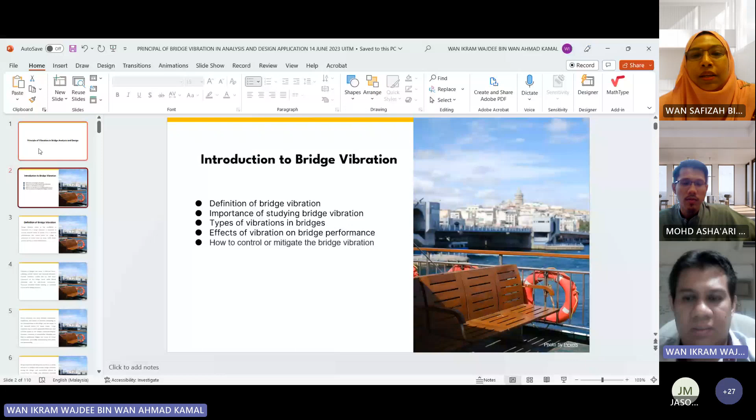Can see? Yeah. Very clear. Okay. Full screen. Okay. It will be better. Okay, thank you, Dr. Wan Safizah and Dr. Asha'ari. And again, good morning and Assalamualaikum to all of you, especially to our students.

Please permit me to share what you can see now on the screen. This is my topic for this morning: principle of vibration in bridge analysis and design. This is the outline, the introduction to this morning's topic. First, let me introduce to you and elaborate the definition of bridge vibration.

Next, the importance of studying bridge vibration: why we need to study this topic when we do the analysis for the bridge. Then the type of vibration in bridges, the cause of the vibration in the bridge, and the effect of the vibration, where we will look into the side effects of vibration on the bridge structure. Then how to mitigate, I mean how to address, this vibration on the bridge.

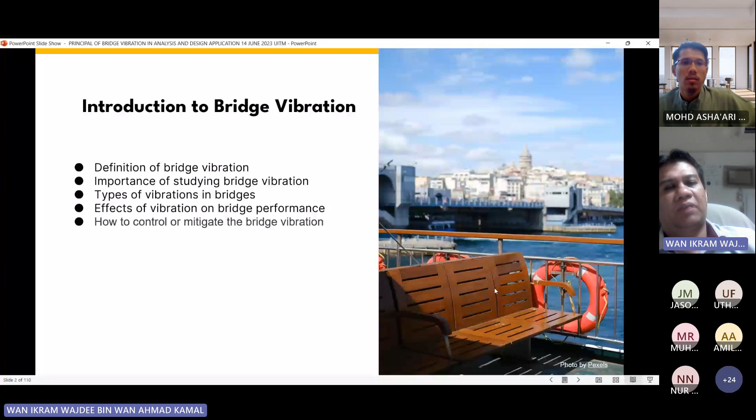First, vibration refers to the oscillation or movement of the bridge structure in response to various external or stimulating forces. It is a dynamic phenomenon that occurs when the bridge is subjected to forces such as wind, traffic load, seismic activity, or other disturbances. Actually, there are many external loads that cause bridge vibration.

For our case, as road users in our country, we are not really affected by seismic activity. The vibration on bridges in Malaysia is due to traffic highway loading. This is our concern now, because when this becomes prolonged, it will eventually affect the performance of the bridge.

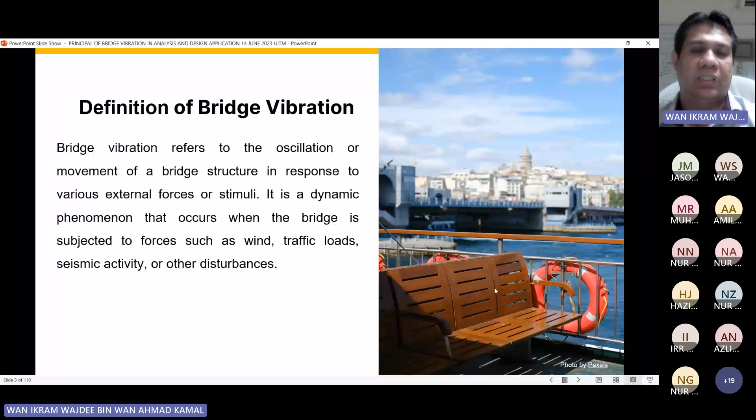Vibration in bridges can occur in different forms, including vertical, lateral, and torsional vibration. When we run the analysis, for example when we formulate the finite element model, we can capture the mode shapes associated with the corresponding vibration frequencies. This result gives the impression that vibration can be induced in any direction of the bridge system.

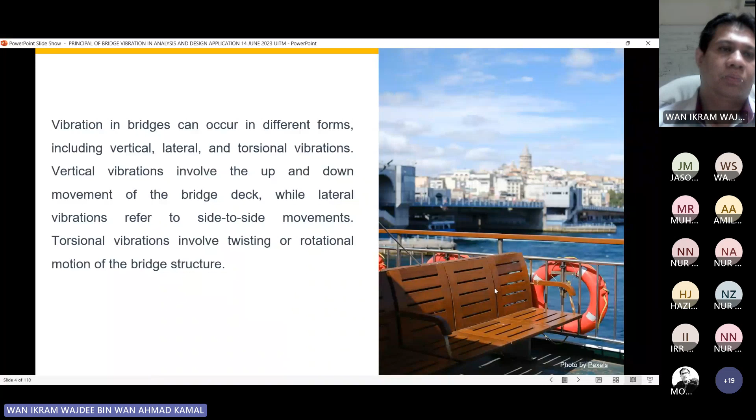For our case, when we do the analysis, the vertical first mode shape is the main concern in the analysis and design of the bridge, because vertical vibration gives more effect compared to the other directions. Vibration can have different frequency, amplitude, and mode depending on the characteristics of the bridge and the nature of the load.

This statement explains that the vibration as well as the frequency of the bridge depend on the geometry of the structure, and also the stiffness: how we as engineers or designers arrange the structure and plan the stiffness of the overall bridge system.

Let's choose one example, like the girder bridge. When we do the design, we give the girder itself as the stiffer component compared to other components like the column or foundation, because at the end of the day this component will take more load, and it directly accepts the loading from the vehicles and transmits it to the substructure.

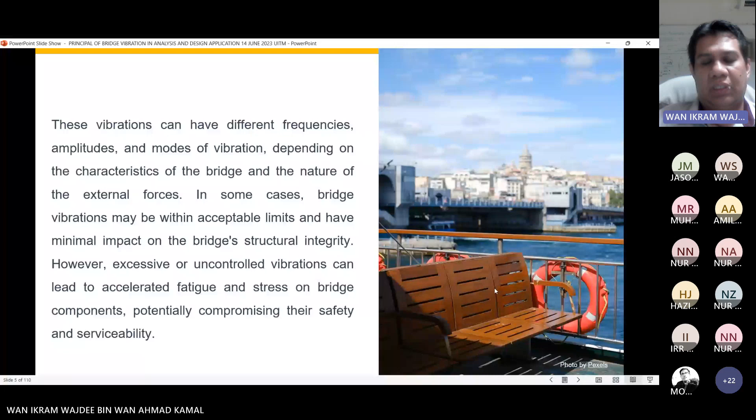As you know, when we do the prestressed beam, the prestress will produce some pre-camber, I mean the upward deformation. When we add the concrete and we do not control the vibration, this pre-camber upward elevation will later be reduced. Then this will likely reduce the performance of the beam deformation, especially the pre-camber performance to cater for the vertical load.

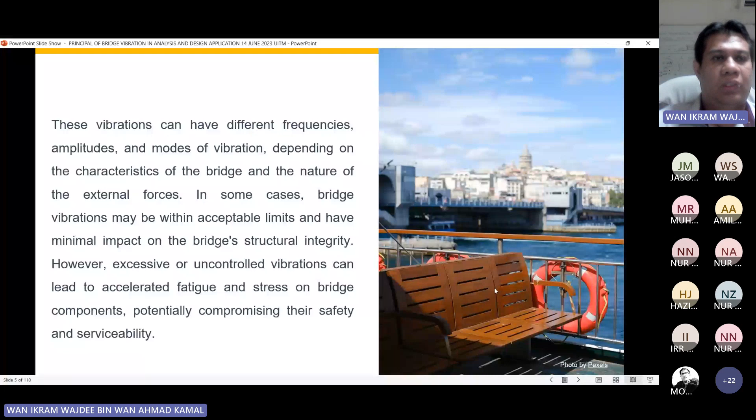Bridge engineers or designers need to be careful to analyze and consider bridge vibration during the design and construction phases to ensure that the bridge can withstand expected forces and maintain structural stability. They employ techniques such as structural modeling. For example, as Dr. Asha'ari knows, when we do grillage analysis, we usually use an appropriate tool like software to model the structure, because we want to predict and understand the behavior and response of the structure when we apply the load. From this modeling, we can capture and comprehend the response of the structure due to the frequency loading and the acceleration of the vehicle.

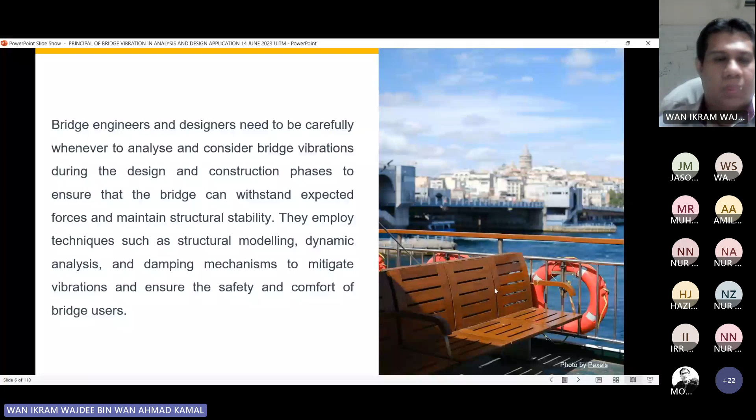Now we go to why we need to study vibration. Vibration is of great importance for several reasons. First, because of structural integrity. Bridges are designed to carry the weight of vehicles, pedestrians, and other loads while maintaining their structural integrity. Vibration analysis helps engineers understand how bridges respond to dynamic forces such as wind, earthquake, traffic loading, and other loads. By studying bridge vibration, engineers can identify potential structural weaknesses. For example, when we do the analysis, we apply the load based on the load combination stated in the code of practice.

As we know, there are two limit states that we need to satisfy. First, the serviceability limit state (SLS), and the second is the ultimate limit state. For the ultimate limit state, we usually design up to collapse. For the serviceability limit state, we consider deflection and vibration. For the ultimate, based on my experience, designers usually do not encounter problems, because the ultimate limit state is common practice when we do the analysis. It is the basic or fundamental in the design.

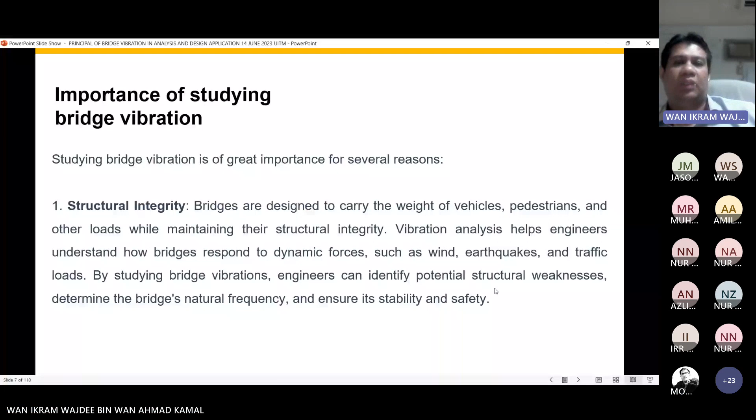Safety and serviceability. Excessive vibration can compromise the safety and serviceability of the bridge. Vibration can cause discomfort for the people using the bridge, affect the performance of vehicles, and even lead to structural damage or failure. For example, in Malaysia, over the last 5 years, and recently, I was told by the maintenance team.

Now the vibration for the bridges, especially bridges with an age of more than 10 years, they notice. I mean the maintenance team told me they noticed the bridge vibration became severe. For example, when they carry out the maintenance inspection, when they pass on the bridge itself, they can feel the vibration of the structure when the span is fully loaded with cars.

For the simple test, usually we just put a bottle of mineral water on the top of the parapet. Then they can see the water inside the bottle is disturbed because of this vibration. The shaking of the mineral water can easily be seen with the naked eye.

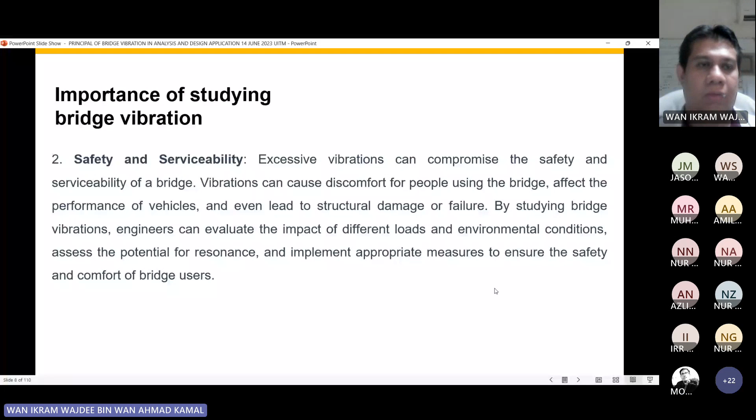Design and retrofit. When it comes to design and retrofit, especially for bridge widening, vibration analysis plays a crucial role in the design of the new bridge, because when we do the widening, we deal with the new and the existing old bridge. For the old bridge it is not a problem, but for the fresh concrete of the new bridge, the vibration becomes important because it can affect the concreting stage.

When the new and old bridge are combined together by stitching the concrete, the old bridge vibration can transfer to the fresh bridge. This slightly impacts the new bridge concrete performance.

That's why overseas, when I study the reports from overseas, actually from European countries, they let the new bridge settle before stitching. They let the new bridge, before they open it to traffic, have some time for settlement to take place first before they combine it with the old bridge.

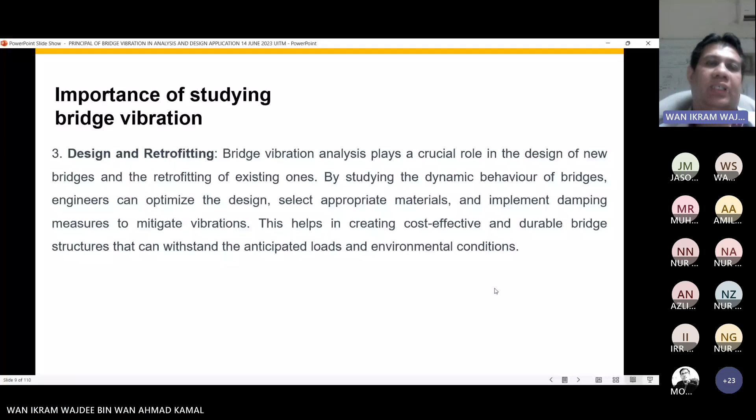Environmental factors. Bridges are exposed to various environmental factors that can induce vibration, such as wind, water flow, and seismic events. For water flow, like a river, when the bridge crosses the river, under the bridge there is a column. Usually the column, the pier, is exposed to the river stream. This river current actually gives hydraulic pressure and also a dynamic load to the pier.

This is based on my previous experience in Kelantan. I was called by the contractor. This contractor told me that the bridge is vibrating, and on the deck we can feel this vibration because of the water flow. So can you advise me what we need to do to avoid this water flow?

So I told this contractor we cannot do anything because we cannot restrain this water flow, we cannot stop the river. So what we can do is try to reduce it by increasing the stiffness of the column. That is one solution. Another one, we need to confine this pier that is subject to the water flow.

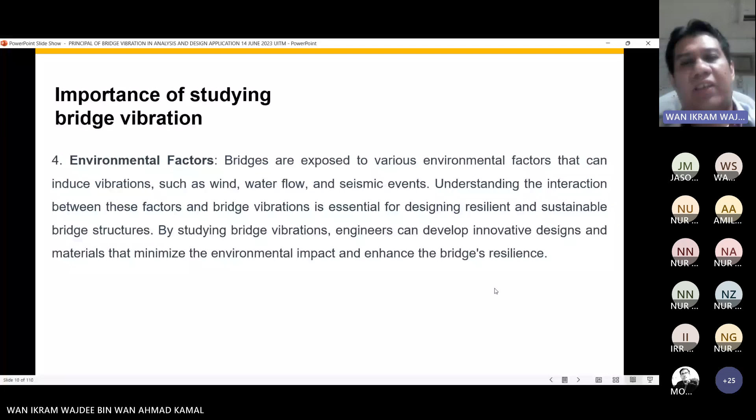Okay, maintenance and monitoring. Bridge vibration analysis is an important tool for the maintenance and monitoring program. By regularly monitoring vibration, engineers can detect any change in the bridge's dynamic behavior, identify potential issues or damage, and schedule appropriate maintenance or repair. This proactive approach helps in preventing major failure, reducing downtime, and extending.

Okay, in UiTM actually we have the team to do the NDT, non-destructive test. Okay, this actually uses the dynamic instrument, instead of what we call the impulse hammer test, and also using the cover meter to detect reinforcement bar corrosion or other tests.

Actually, this UiTM team has the instrument using the dynamic test to predict the vibration, I mean the structure response, by measuring the frequency and mode shape, and then converting it to the stiffness. Okay, this test can be done by comparing the control model, the undefected model, the perfect model, with the defect model. By having these two results, we can measure the severity of the affected structure by comparing with the control model result.

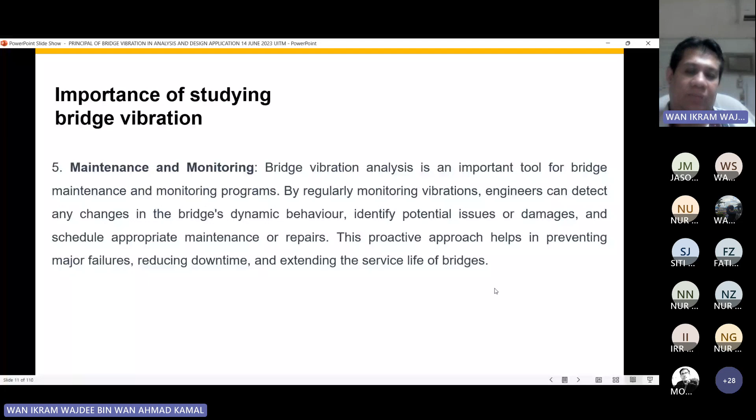Okay, for example, there are two design parameters to satisfy the code. First, the acceleration, I mean the vertical acceleration. Then the second one, when we do the dynamic analysis, we need to comply also with the minimum frequency. For BS 5400, it has been stated that 5 Hz is the minimum frequency that the designer has to comply with.

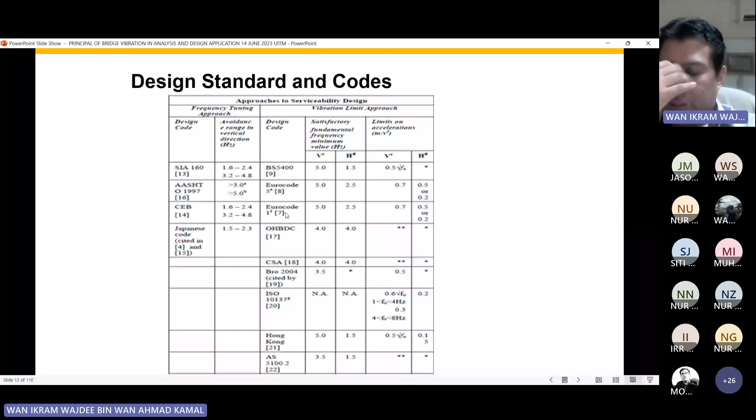When you do the design, I mean the planning for the bridge system, make sure your fundamental natural frequency cannot be less than 5 Hertz, because when you have the minimum frequency of 5 Hertz, you will satisfy all the conditions, I mean all the vibration problems. Okay, the Eurocode also follows the BS code. They have the 5 Hertz minimum we need to comply with for the dynamic needs.

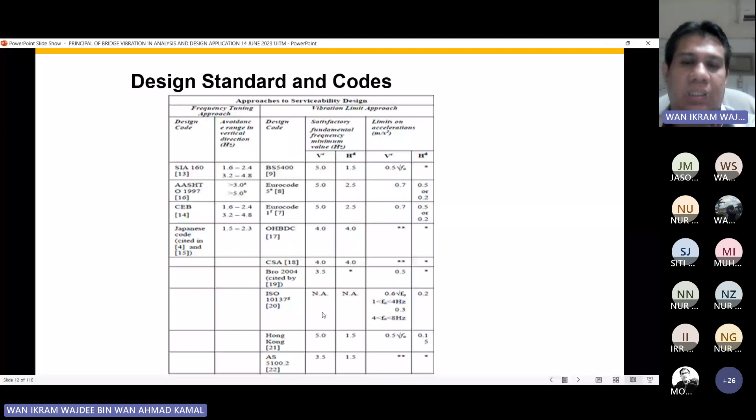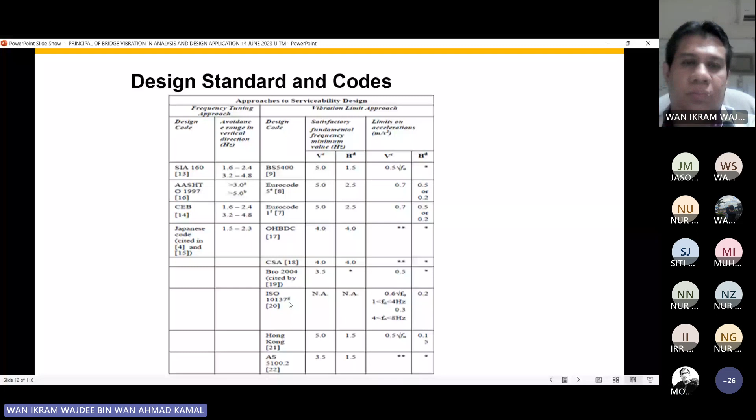Okay, like the ISO, so far no frequency has been put into it, but they have introduced the acceleration control as a guidance for the designer to follow. Okay, this is based on the ISO acceleration classification. When we measure the acceleration on site, this is the guideline we need to refer to. For example, if the vibration reading from the bridge is less than 0.315 meter per second squared, that means your bridge is okay.

But if certain frequencies fall into this category, then you need to be aware. Either you need to try to mitigate by installing a mechanical device like a damper, or maybe you need to retrofit your bridge by increasing its stiffness, or recast your bridge to become stiffer than the current stiffness. It can also be done by installing the parapet, so that the overall stiffness of the bridge will increase. And when the stiffness of the bridge increases, you increase the natural frequency of the bridge.

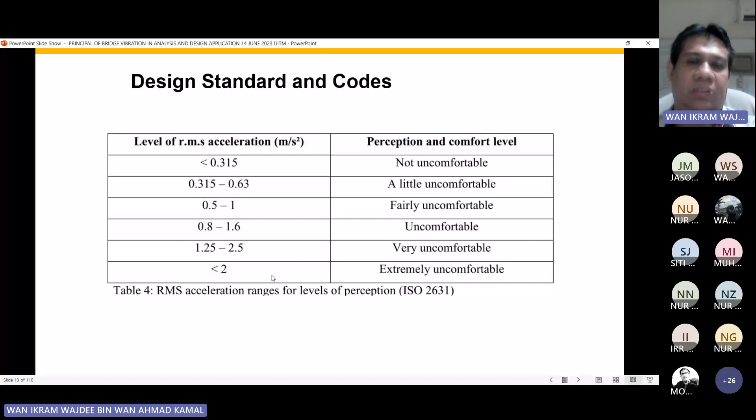Okay, presently the bridge structure is considered part of the transportation system, especially in highways. The application and usage of this notable structure is undeniable in providing a crucial role to road or highway alignment design, mainly where the complexity of highway design demands a solution. Nowadays we see much of the road network in Malaysia busy constructing flyovers, I mean elevated highways, because especially in the Klang Valley, they do not have the luxury of land to construct the road at grade.

So to mitigate the lack of land for new roads, they have to go the alternative way by providing the flying road. To support this flying road, they have to construct the elevated bridge, I mean the elevated highway. Okay, so you as students need to prepare yourselves for when the government or project owner asks you to provide some structure to support this flying road.

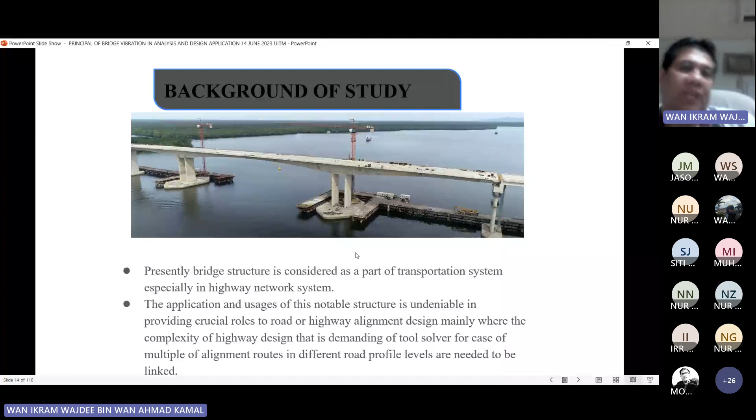This is the MRR2, you can see the picture. This is the MRR2 in front of the Flamingo in Ampang. Okay, this is what I told you just now.

The second bridge, the second viaduct. You see from this, from pier to pier, the effective length is almost 40 meters, about 39 point something.

This bridge, you can see the arrangement of the beams being very close actually. Looking at the arrangement with our eyes, we don't expect the bridge will experience vibration because the bridge looks like this, very stiff. A number of beams have been put on the pier to support the traffic loading. But this bridge was experiencing very clear shaking.

I also can feel the shaking of the bridge, especially when a heavy truck passes by. So I believe the designer for the bridge also did not anticipate the bridge will experience vibration, because of the arrangement of the beams, and the beam itself is quite deep, and the beams are side by side. The beam spacing is less than 2 meters.

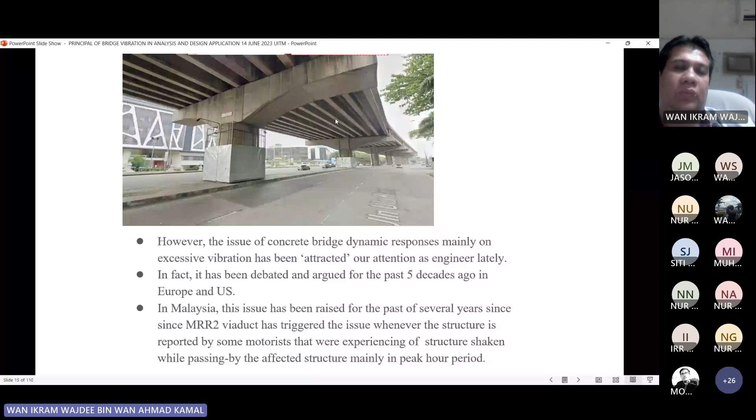According to the previous inspection report that has been done by the JKR Forensic team, that time led by Dr. Lim Ka Ching.

Actually, there are many bridges affected by vibration, but the ones clearly reported by the public, I mean by the client, to the forensic team are Sungai Muar Bridge, Golok Bridge in Kelantan, and Jalan Kinabalu Bridge. This is the old bridge, after 20 years it will experience some excessive vibration.

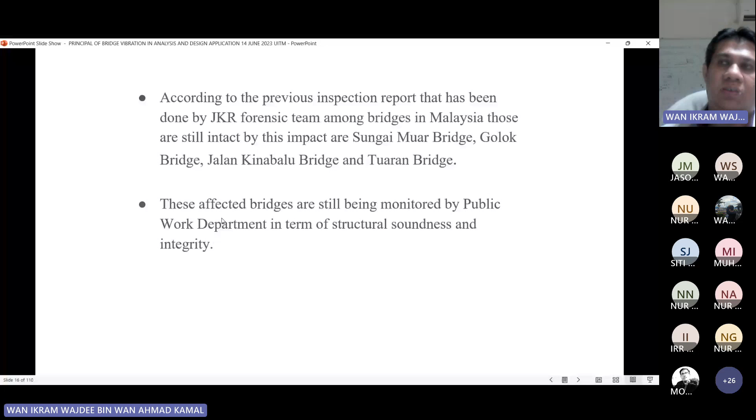These affected bridges are still being monitored by the Public Works Department in terms of structural soundness and integrity. Usually we monitor in terms of the cracking and also the deflection.

In current practice, engineers design their bridge according to relevant codes of practice. For example, as we know, in Malaysia we always follow BS 5400, Eurocode EC2 for concrete, ACI. Sometimes for the box girder, we also use other than BS and Eurocode, we use supplementary documents coming from American code, and some relevant technical documents like the term of reference BD 3701 and JKR term of reference.

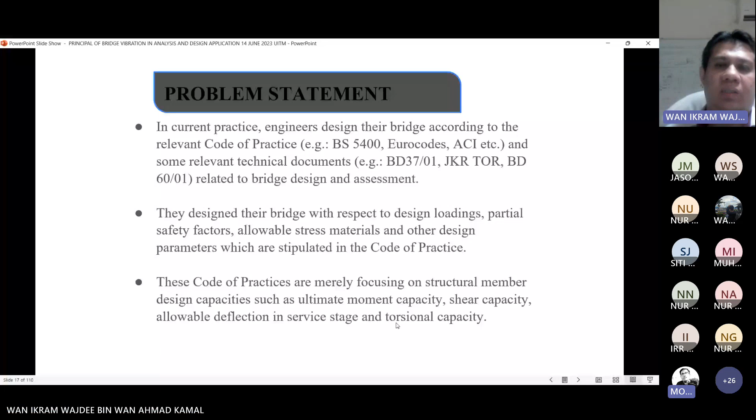These Code of Practices are mainly focusing on structural member design capacity, as I mentioned just now. They really focus on the first stage analysis design, moment capacity for the ultimate checking, shear capacity, allowable deflection for the SLS, and torsional capacity. In other words, it has only been emphasizing the first principle order. However, not many of them have concern for the issue of bridge dynamic behavior.

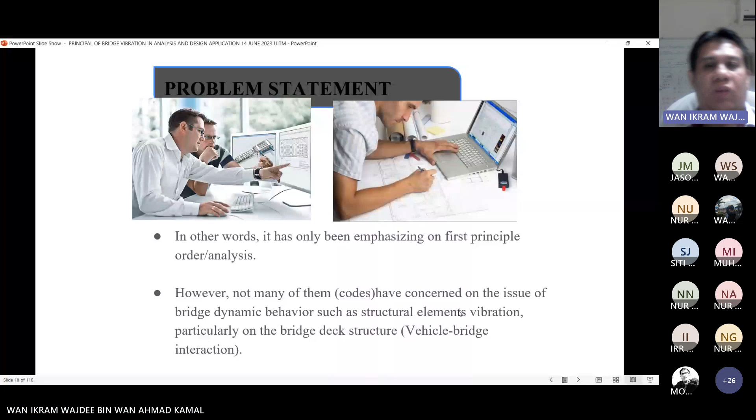Moreover, this problem has led to structures experiencing both forced and natural vibration phenomena, especially as a result of daily traffic loading patterns from moderate to severe loading after some time. Unfortunately, this issue has not been looked into seriously by our designers, since it may cause adverse effects and be detrimental to structural health, as well as overall performance of operation in the long run, like the fatigue loading.

And the vibration can also affect the structure's life, as well as the material involved, like the bearing, especially the joint, and also the structural component, I mean the beam itself.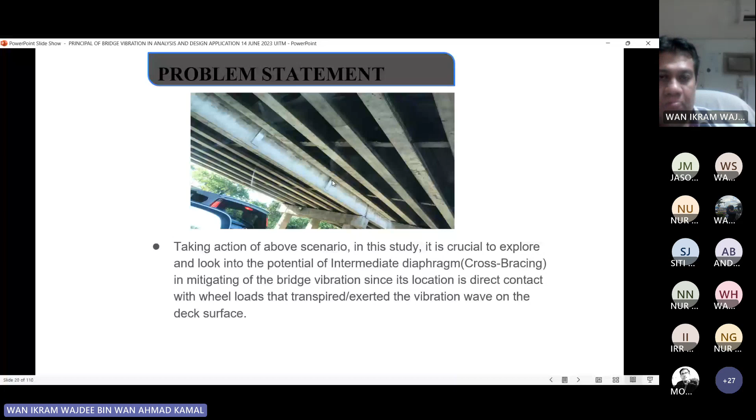Bridge design consideration - as I mentioned earlier, vibration. We need to know the impact of vibration on bridge design, and on material selection. As I said, the vibration for concrete elements is lesser than steel elements; for railway steel bridges, the vibration is more than concrete railway bridges.

Then structural modification - when we do the analysis, it is quite important and crucial for the designer to perform a secondary analysis, I mean the dynamic analysis. By having the second analysis result, we can know whether this structure can perform okay or not after we open it to traffic.

When we check the first order analysis, like the ultimate limit state, sure the designer will be happy because all the requirements are passed. But when it comes to the secondary analysis, we cannot say this. As a designer you cannot be so confident to say your bridge satisfies all conditions until you satisfy the secondary checking first.

Based on my experience performing secondary checking for past bridges done by other consultants - I was invited by JKR, LLM, to perform the checking - the majority of bridges in Malaysia, when we did the dynamic checking, cannot satisfy what the requirement has stated in the code of practice.

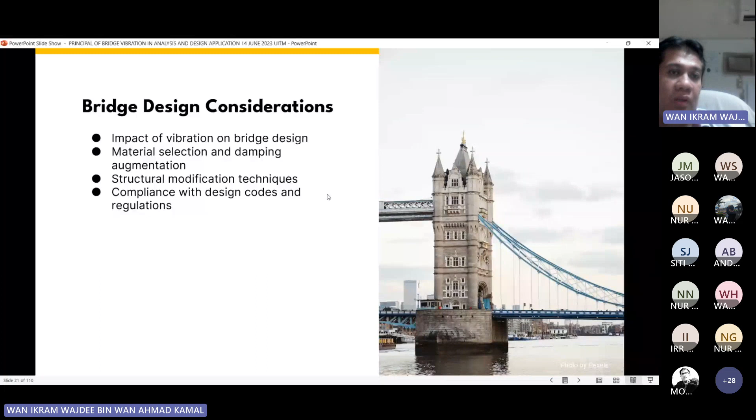Now, cause of vibration. As you know, vibration can come from vehicle traffic loading, or from wind load, but in our country this load is not really critical because our country is not situated in a typhoon, or cyclone, area like other countries such as the Philippines.

Vibration from pedestrians is a very small impact to the concrete bridge due to pedestrian activities, because for the road bridge, they have the capacity to overcome this pedestrian load. But year by year the traffic volume will increase, and as you know, heavy vehicles increase as well as normal vehicles, and this increment will also lead to higher vibration to the bridge.

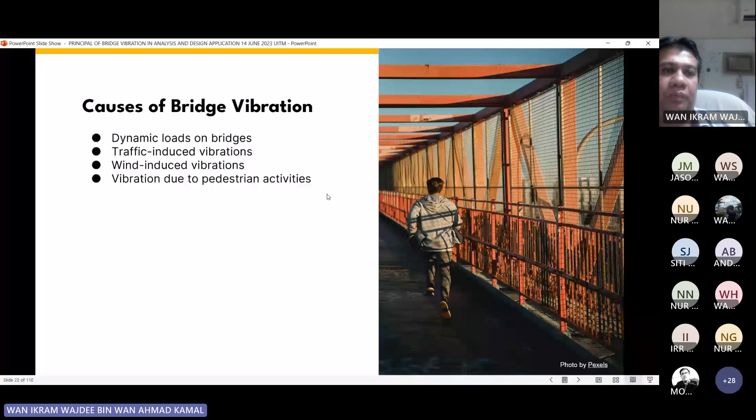Depending on the type of the bridge, as I mentioned, vibration can also come from seismic activity. But for our region, we are close to Indonesia as well as the Pacific region for seismic activity, we just have tremors, small vibrations.

According to my colleague Dr. Zamri from the earthquake center, the earthquake effect from our neighboring countries like the Philippines and Indonesia gives more effect to the Sabah area on the Borneo region only, but the peninsula is not really high.

When we do vibration control in the design, especially for seismic, usually we use 3% of the live load loading, applied as a static horizontal load on the structure. But when we use the JKR document, JKR usually wants to use a slightly higher value than what we applied previously from the Australian practice. For JKR, usually they use a bit higher, 20% live load plus dead load, applied horizontally to the structure.

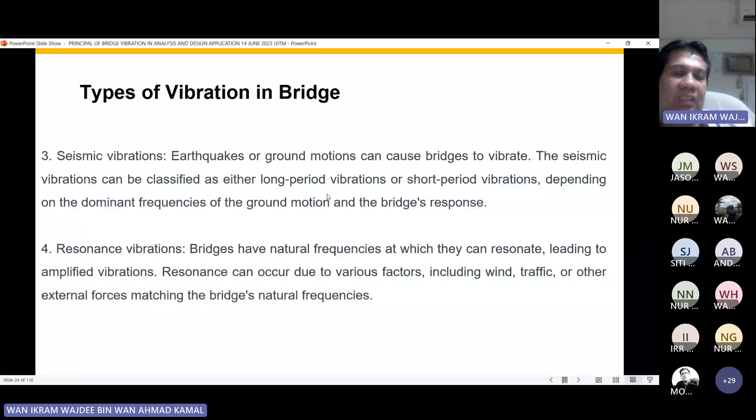Resonant vibration. As I mentioned, your project Kinabalu Bridge for the MRT, we can say it has resonant vibration, but it is categorized as small resonance, not like the Tacoma Bridge resonance. We can see it as a small or minor resonance to the bridge, because we can feel it - when we stand on the bridge, we can feel the vibration, and it's called minor resonance.

Now, cable vibration. Cable vibration usually occurs for example in cable stay bridges. Usually the vibration will take place when traffic cars are moving on the bridge. Sometimes this cable vibration can also occur because of wind load. If you go to Putrajaya, you can visit the signature bridge like the Wawasan Bridge, or go to Precinct 8, you can see the cable stay bridge there.

When we stand away from that bridge, somehow we can see the movement of the cable when a few cars pass by on the bridge. I want to highlight here: we cannot stop the vibration. This is the norm, this is natural, the fundamental physics. We can control it, but we cannot eliminate this phenomenon of vibration entirely - we can only control it under certain conditions imposed cooperatively. But I can say we cannot stop it, we cannot eliminate it at all.

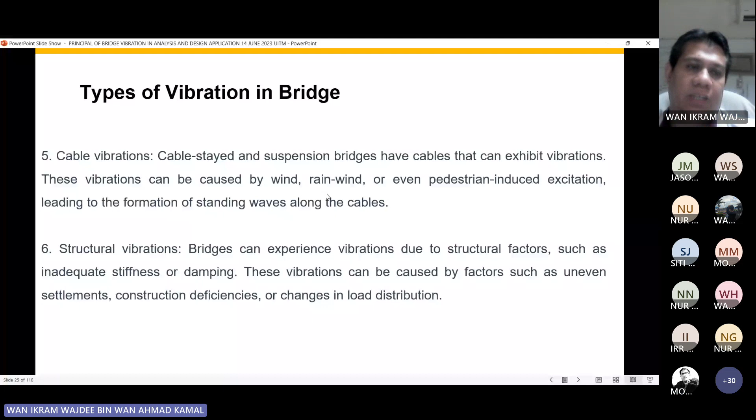It is important to note that excessive vibration can lead to structural fatigue and accelerated wear and tear. I agree, because for example we have the rubber bearing underneath the beam. We use the normal damping rubber bearing. From my experience during inspections, we could detect the rubber bearing melting, because of the wear and tear process.

The beam vibration was very high, and the traffic volume was very high, like in the Puchong area. Last time we went for inspection under the bridge and noticed that not one but 3 or 4 rubber bearings were melting because of shear and expansion problems, and also because of the vibration. Therefore, monitoring and analyzing bridge vibration are crucial for ensuring their safety and longevity.

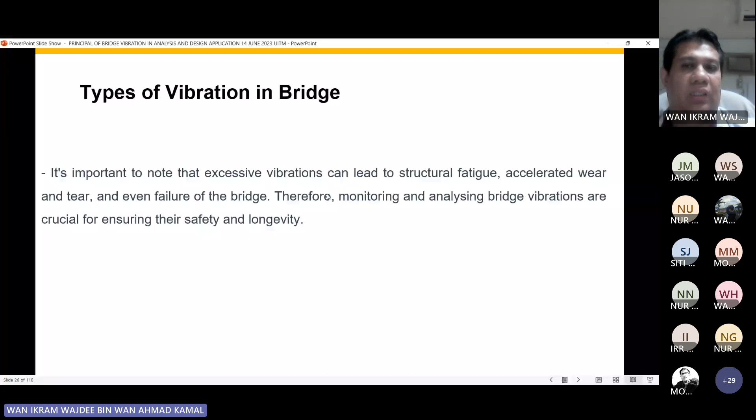Okay. Vibration can affect various components and potentially compromise the structure. Here are some common adverse effects of vibration. Fatigue failure: as I mentioned, repeated vibration can induce fatigue stress in bridge components, especially in steel bridges at welded connections and high stress regions. This happens in both concrete and steel. Over time, this can lead to cracks and fracture.

These cracks actually happened on a steel bridge, the KTM bridge, when I went for a site inspection. We noticed the steel bridge had deflected very obviously, and when we checked, we detected structural cracks, not minor cracks, at the midspan, due to excessive loading and excessive vibration.

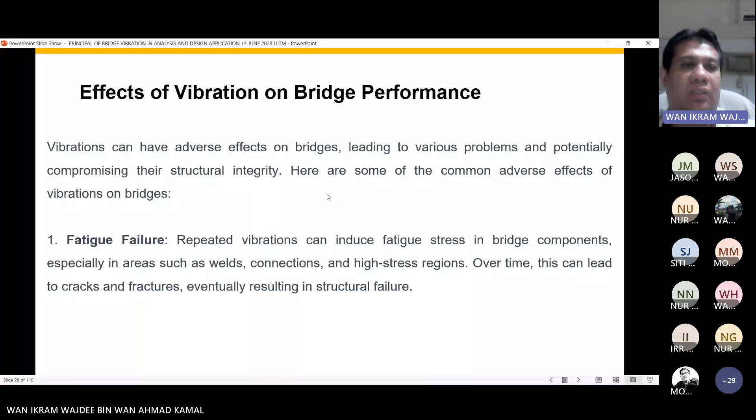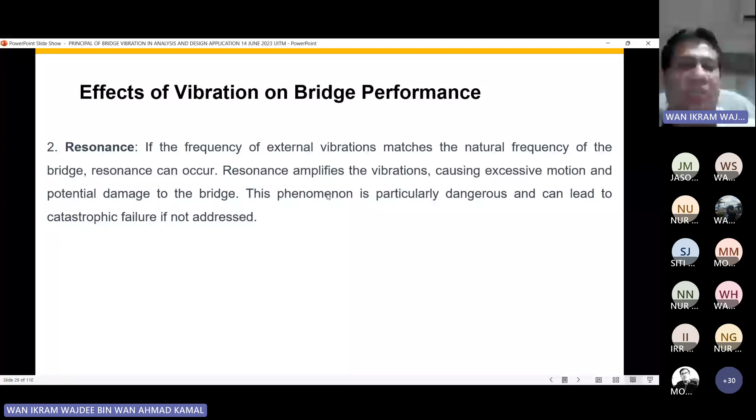Resonance, okay. As I said, resonance is also about frequency. Actually, resonance happens when the frequency of the loading matches the fundamental frequency of the bridge, I mean of the structure, and resonance will take place. Resonance amplifies the vibration, causing excessive motion and potential damage to the bridge, of course. This phenomenon is particularly dangerous and can lead to catastrophic failure if we do not overcome this.

Okay, this is the example. This is the LDP Puchong Bridge, near to the cable stay bridge, Motorola Bridge. This one is the concrete bridge. When we did the inspection, we detected what is called the walking bridge, because when we did the study, this walking bridge happened due to the excessive vibration.

You see, the vibration. Actually, the way we put the bearing under the bridge is just free sliding, based on the friction. There's no stopper, and there's no dowel bar to pin this bridge, I mean to stop the bridge. Actually nowadays they provide a key to prevent the bridge from being displaced like this.

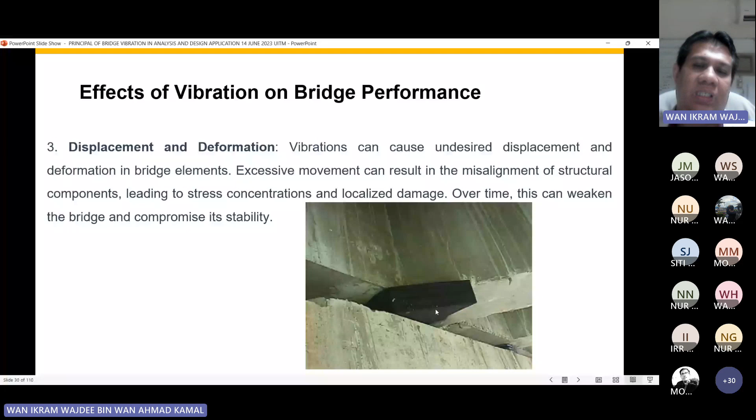So actually I want to mention here the vibration here is very high. And also the traffic volume was quite high at that time, especially at the peak hour. And because of the excessive vibration, this bearing has been displaced from the original location.

Okay, this is the screenshot; I got this from Malaysiakini. I also have the detailed forensic report from JKR about it, but I cannot share it here. But since this can be shared and was published to the public through the news, I share it.

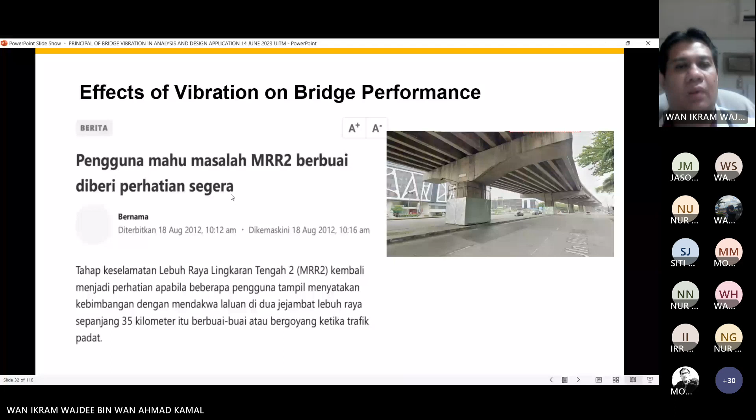Okay, this is based on the report from Dr. Ernst King: Sungai Muar Bridge, Sungai Golok Bridge, the bridge at Jalan Kinabalu. Actually, there are more than this. Based on my conversation with the JKR team, they said now many bridges have been reported experiencing problems after 10 years.

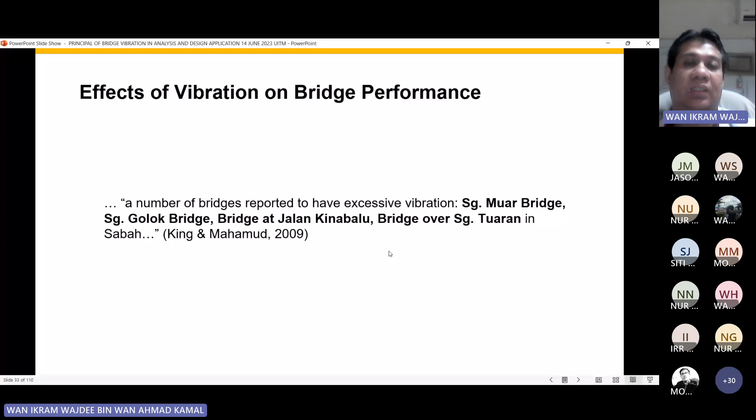Deterioration. Vibration can accelerate the deterioration of bridge materials, such as spalling for the concrete, and for the steel, vibration can loosen the bolts and nuts, I mean the connections. For the LRT, we have the rail, and we clamp it using bolt and nut connections. If we do not install the tuned mass damper, TMD, a mechanical device, I mean the absorber to reduce the vibration, I believe the vibration triggered by the LRT load will cause the bolt and nut connections to loosen very fast.

That's why they install the damper at the rail, at the track, to control the vibration, so that the maintenance period can be longer, can be extended from the usual.

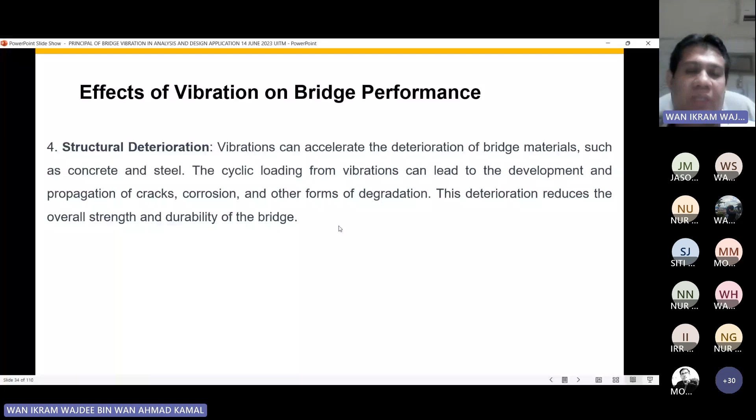Comfort and safety concern. High intensity vibration can affect the comfort and safety of bridge users, particularly pedestrians and drivers. Excessive vibration can cause discomfort. As I said earlier, when you drive your vehicle over the MRR2, but you stop at the roadside, you can feel the excessive vibration happening right now. That bridge still vibrates until now. There's no action, I mean no retrofitting has been conducted.

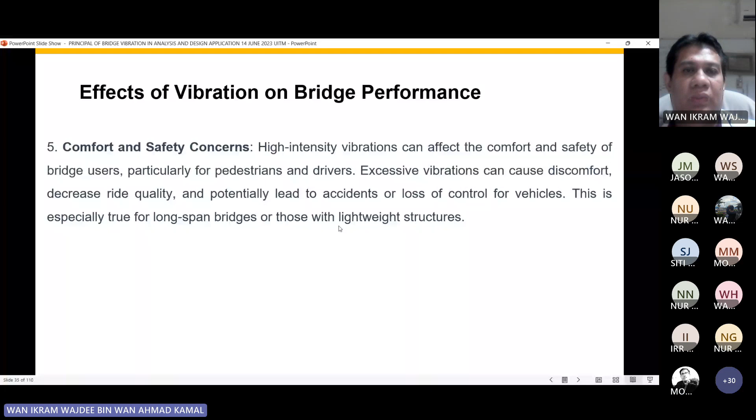Vibration can also affect the functionality of the bridge system, including electrical, like the electric feeder, and mechanical and hydraulic components. For example, the rainwater downpipe can lose its parts because of the vibration. When we have a bridge, usually we need to install the pipe to discharge the rainwater from the deck. This piping is always displaced from its location because of the vibration.

Nowadays, the manufacturers provide rubber to reduce the vibration, I mean to minimize the impact of the bridge vibration on the rainwater downpipe. They have introduced a damper, a small rubber, and put rubber bearings at the supports of the rainwater downpipe attached to the bridge parapet, under the parapet.

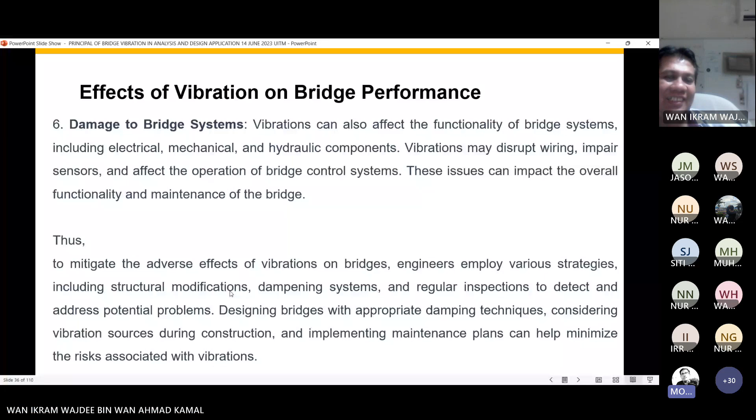Okay, understand, Dr. Ashari? Yeah, understand. It's clear. Okay. Any questions so far from the floor? Maybe we can make it at the end of the session. Okay, you can interrupt me, I have no problem, because I'm open to discuss.

How to control or mitigate bridge vibration? Controlling or mitigating bridge vibration typically involves a combination of these. As I mentioned, usually we increase the stiffness, and maybe we introduce another secondary member, like what the designer just introduced, using a secondary beam installed transversely. Here are some strategies that can help control or mitigate vibration.

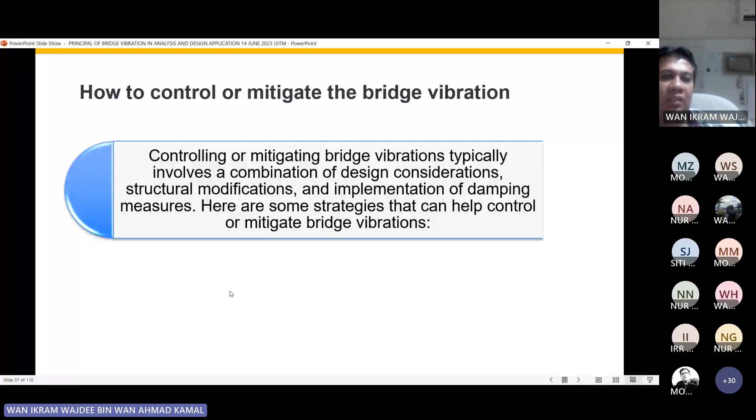Conduct thorough, detailed dynamic analysis during the design phase. This is the first step we need to do in design planning. We need to study the material that we use. For example, the concrete grade, not only with respect to durability, because each grade gives a different vibration response. We need to study this too, and choose the appropriate type and combination.

For example, nowadays there are assumptions, myths I can say. Designers might think that using a box girder reduces vibration, lower than a beam-and-slab. Actually, that's not true, because based on the journal that I read, multi-cell, for example, this is the example.

Okay, actually multicellular beam, U-beam also, when we provide with the sufficient number, also can have the lesser vibration reading than the box girder. That's the one thing. This happened in the LRT project, LRT3 project that is currently under construction. Okay, they are of the opinion that by using the single box girder, single U-trough, span 20 meter, the vibration is lesser than the common U-beam.

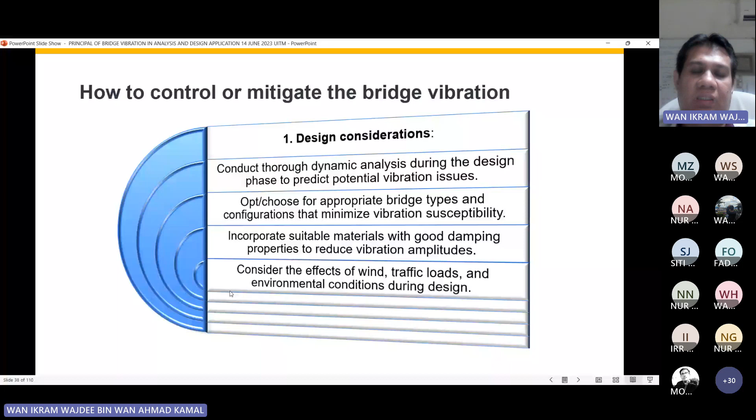Okay, structure modification. As I mentioned just now, it involves modifying the stiffness of the main member of the structure. Then I also want to mention here that the boundary condition or support condition also can play a role in the vibration. For example, when I was involved with the SUKE project, the Sungai Besi Ulu Klang project, there were two design approaches introduced to me, because I was the lead consultant. So there were two proposals from different consultants.

First, they came with the continuous bridge, I mean the integral bridge. Another one is the common approach, using the rubber bearing, I mean simply supported but multi-span. Then when I asked the first engineer why he opted for the monolithic, he answered: first, they want to reduce the maintenance and omit the usage of the rubber bearing. The second thing, he wants to reduce the vibration. And another one is they want to go to a slimmer structure by having this continuous and monolithic structure.

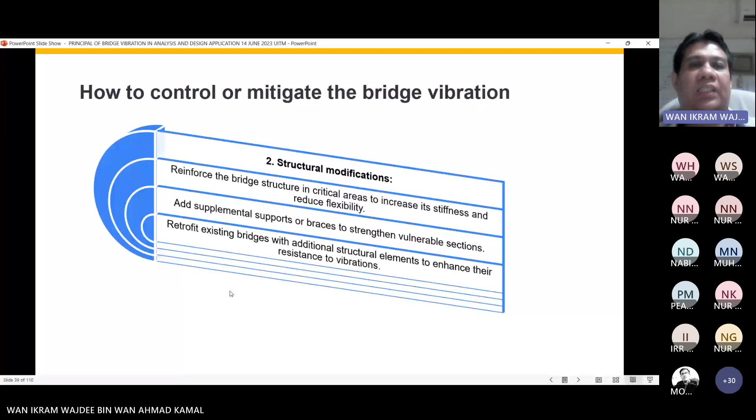Structure modification: reinforce the bridge structure in a critical area to increase the stiffness and reduce flexibility. This is about the section. Not only do we top up the section, I mean the concrete of the bridge. There's research, conducted by a researcher from China, which found that the arrangement of the steel also affects the response of the bridge. Based on the different arrangement of the passive reinforcement bars, the response of the structure also differs according to the way we arrange the reinforcement, either parallel to the beam or diagonal.

And also the way we lay the cable, how we design the prestress cable profile, gives a difference in terms of the acceleration reading. Let's say we compare using a straight cable, and in another case a parabolic cable; it also gives a difference in terms of the structure response.

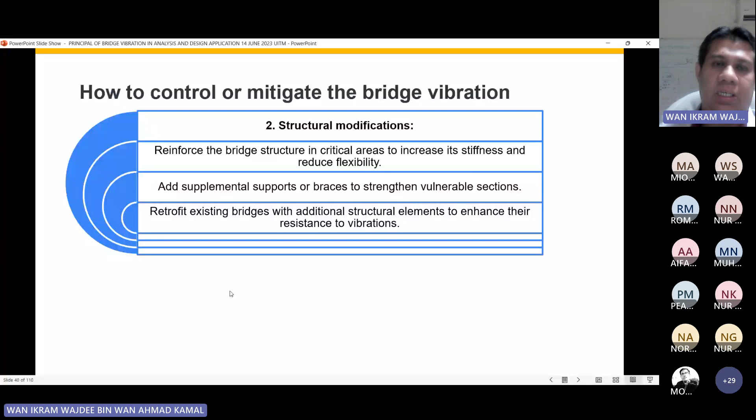The damping technique is the common way now. For example, the LRT. For slim and slender structures, we use a tuned mass damper to absorb the vibration. This tuned mass damper usually has a liquid, or sometimes we use lubricant oil as a hydraulic principle to take the dissipated energy from the working structure. Utilize passive dampers such as viscous dampers and friction dampers. Okay.

Usually for the tuned mass damper, we use it along with the accelerometer, because we want to monitor and study the vibration reading. Because with this vibration wave we can also detect some damage of the structure. Based on the dynamic test, we can foresee the behavior of the structure if the structure has some local damage on its members.

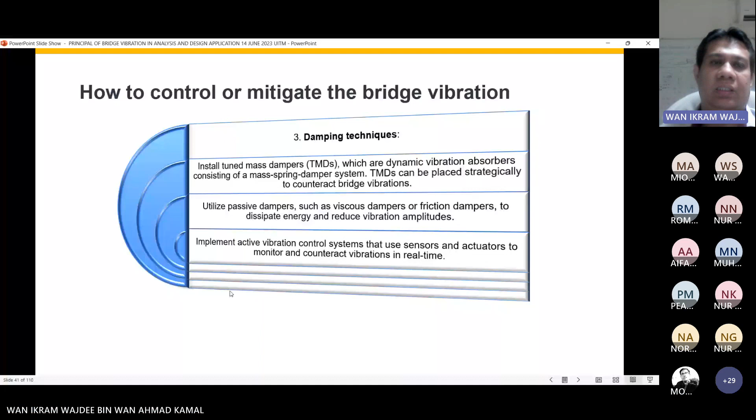Usually from there we can detect slight anomalies in the vibration reading. Then we can know whether the stiffness is okay or insufficient, and we can also measure the severity of the damage on the structure. Another way to mitigate the vibration is to regularly inspect the bridge. This is the common way, by physical observation. This has been practiced by the JKR and also by the LLM.

Implement an ongoing monitoring system to detect and analyze bridge vibrations. This can include sensors like the strain gauge, accelerometer that I'm using now, PCB piezoelectric accelerometer, and also inclinometer, which have been installed on site to check the structure deformation.

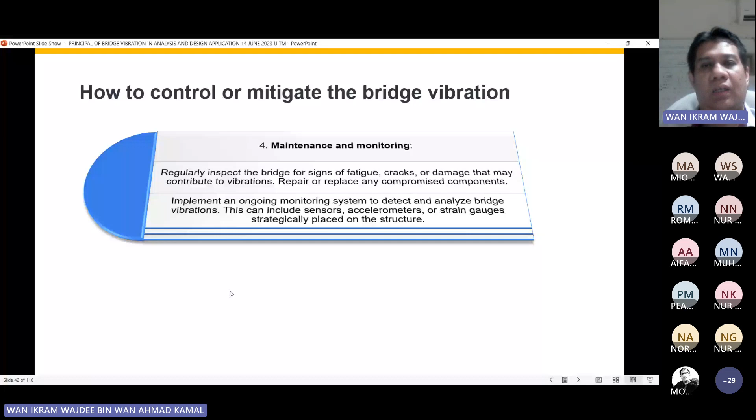This one is aerodynamic modification for the bridge. For example, for our case, for the beam, we can play around with the corner beam, the H beam, to have a more aerodynamic-friendly design to cater for the dynamic effects of wind direction and wind forces. Usually when we start doing this, we need to study the direction of the wind flow, when the wind flow direction significantly affects and gives impact to our bridge.

Usually we try to modify the outer girder, outer beam - let's say the most left hand side - and instead of the T beam, this corner beam, this H beam only, we use the U beam, and the inner beam we go back to the T beam. This has been practiced for the first widen part of the bridge. We used different stiffness of the beam: the outer beam we use the U beam, the inner beam we use the T beam with the same depth, because we want to cater for the aerodynamics due to the wind load.

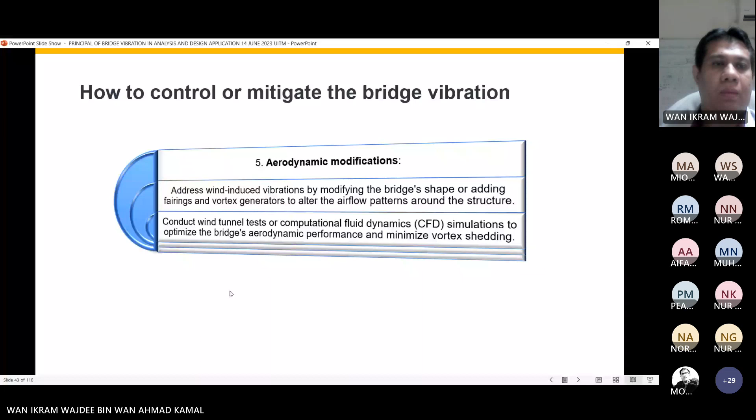In summary, this is the way we control vibration: by using mechanical devices, passive control measures, active control measures - all these devices are dampers - and then modification of bridge design. This is the fundamental of vibration control. We modify the bridge geometry, I mean the bridge stiffness.

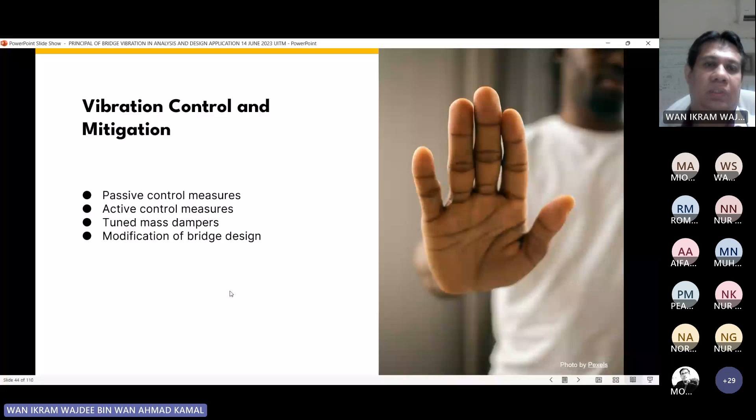It's important to note that the specific approach to controlling vibration depends on factors such as bridge design, material, location, and intended use. Consulting with a structural engineer expert in bridge dynamics is recommended for a comprehensive assessment and tailored solution.

Actually, in Malaysia, the practice to consult with dynamics experts is rare. It's a bit rare because in our location, the bridges in Malaysia do not have the heavy wind load like the typhoons in the Philippines. So this exercise is not really applicable in Malaysia.

But when it comes to dynamic effects from traffic load, and also from seismic activity, as a bridge engineer, I think nowadays is the time all bridge engineers especially need to consider this, because by the time the seismic intensity will increase, since the seismic fault is approaching our Malaysia, our country, continentally - especially from Sumatra.

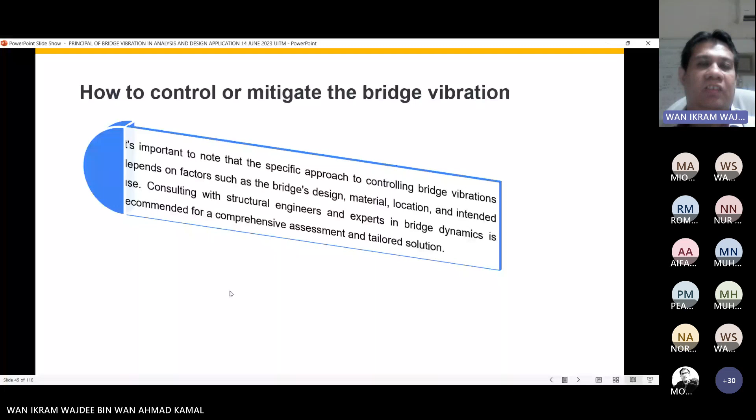The modal analysis is actually the process of how we process the data. The data consists of the transfer function, and then the time domain and frequency domain decomposed from this dynamic test. Our role is to try to decompose, I mean simplify, this data that we capture from the site, so that we can transfer it into readable data results. That's what we call modal analysis - we process the site data and transfer it into a readable report.

There are several ways to process the data. Usually we use the curve fitting method, where we convert the transfer function data from the site to the modal properties - I mean, we convert it to the frequency, natural frequency, damping, and vertical acceleration. There are three, actually four, modal data usually used by the structural engineer: first natural frequency, damping value, mode shape, and acceleration.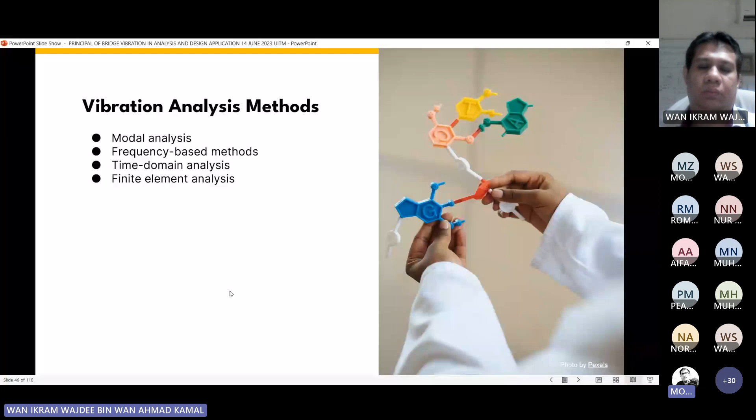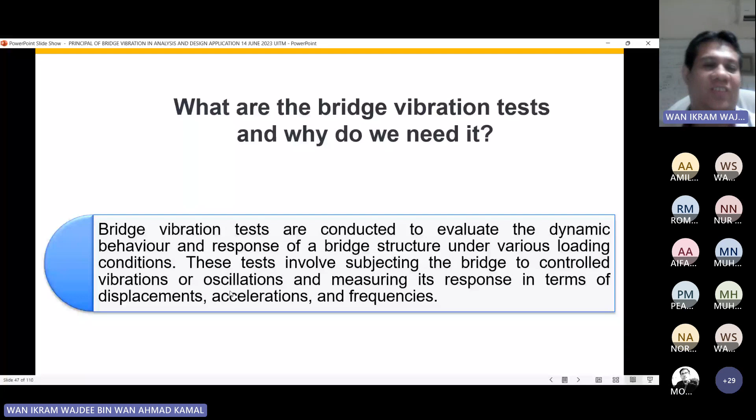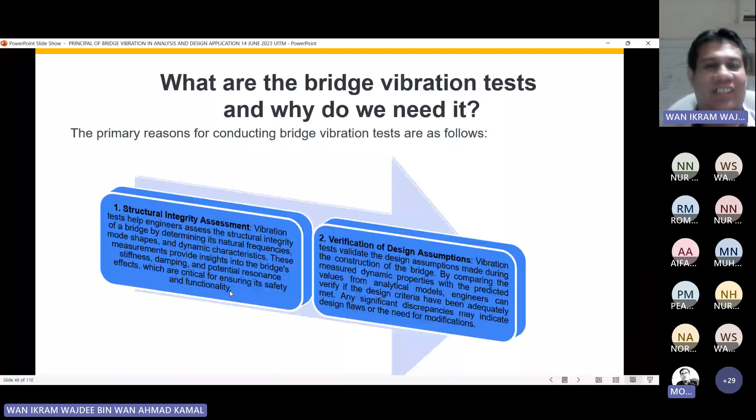Okay, can I interrupt? Because we are running off our time. Can you sum up your presentation, because we will move to the Q&A? Yeah, very fast, because we've spent 2 hours already. Okay. Okay. The rest we can make another session, maybe. Okay, I think we...

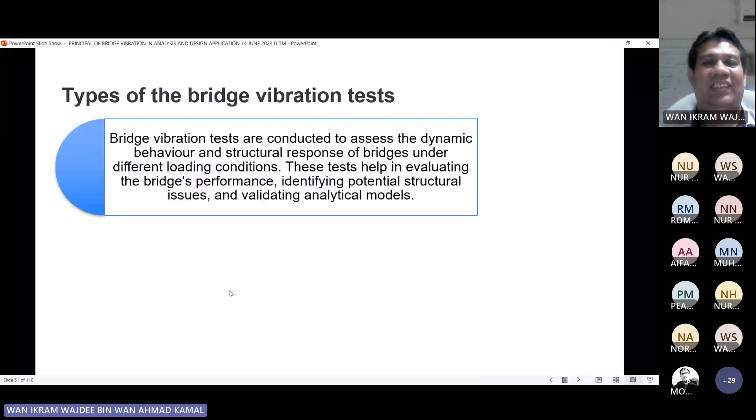Okay, there are two types of vibration test, as I mentioned, these are two major tests in dynamics. First, operational modal analysis, and second, experimental modal analysis. The outcome result is the same. At the end of the test for both, we test the frequency of the structure, damping, mode shape, and acceleration. But what is the difference between these two?

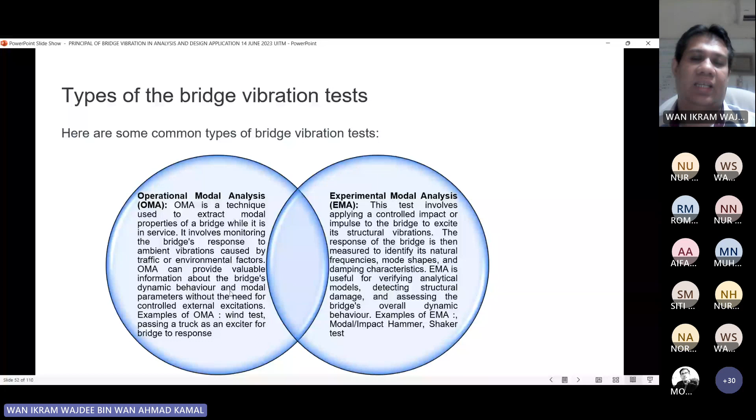Okay, this is the procedure to set up the vibration test.

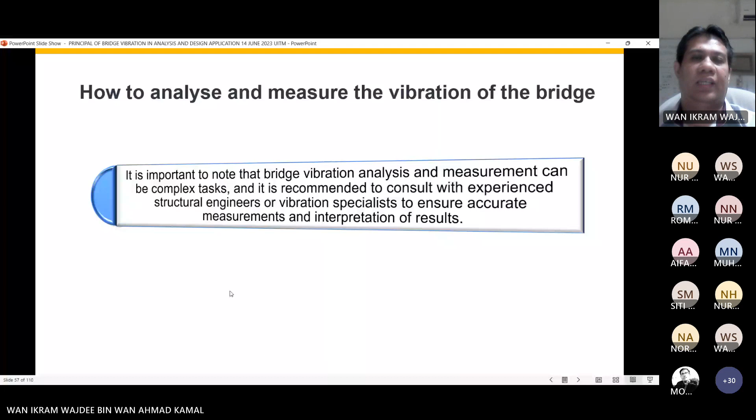Okay, I want to summarize my presentation. As a structural engineer, it's important for the designer or analyst to understand the response of the structure when we impose a load. As a student or engineer, when we give a unit load, we can calculate the deflection directly based on the force-displacement method or Macaulay method. There's also the slope deflection method. But to estimate the dynamic response of the structure, we don't really understand it well. As a structural engineer, I can say I'm not really good in dynamic analysis, but I'm still learning, I try to understand.

I can say I'm exploring how to understand the structure from a dynamic viewpoint, because the dynamic subject is very important. The dynamic behavior of a structure, we cannot get the response immediately after the structure is put into service. Actually, it is time dependent. For example, my structure...

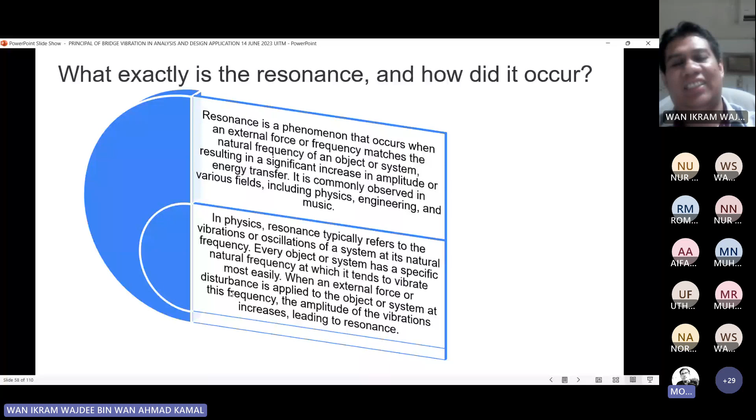Okay, Dr. Wan, can you continue with the Q&A?

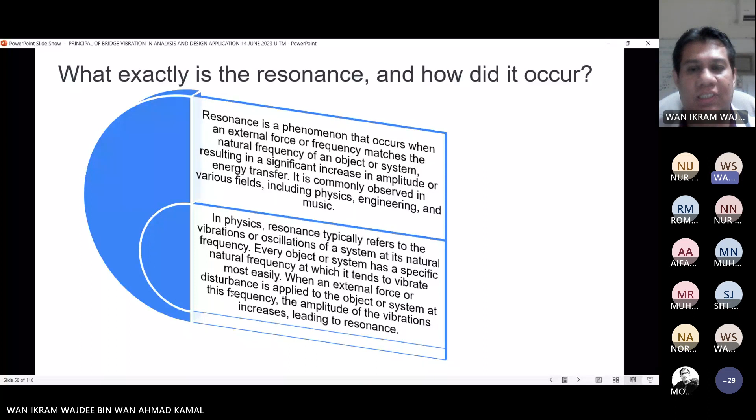I mean, thank you, Wan Ikram, for a very impressive sharing. Hopefully all the students can get a clear picture on how vibration actually contributes an important role in bridge design.

I think I would like to open the floor for any questions. Students, you can raise your hand if you would like to ask a question, or you can write in the chat room as well.

Okay guys, don't be shy, you can ask me anything. Don't worry, you are students. I always tell my students in class, don't be shy. If you want to study, don't be shy to ask a stupid question. I'm willing to answer, because you are still in ignorance, don't worry. We are students, so we often need to study. Okay, any volunteers? Ask.